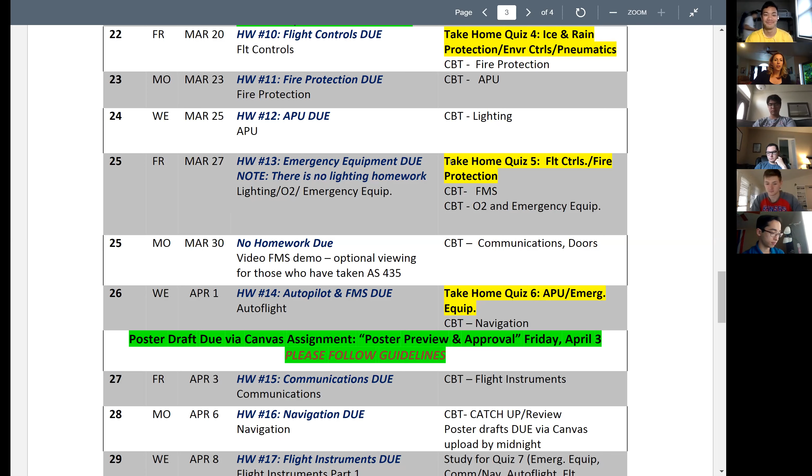I usually download your paper, help edit it, and send it back. If you're done with that, good on you, that's a plus. So we're still doing the take-home quizzes.

This class is actually perfect for online, it's great because you've got your CBTs already. Is anyone unable to access things like CBTs from where you're at? Pretty easy? Okay, cool. Email me if at any point you're unable to access something you need.

As far as the posters, that's up in the air. I think you should be able to create them if you have PowerPoint or Publisher. Wait, PowerPoint? Yeah. Oh, I don't have Publisher, so I have PowerPoint. Okay yeah, so if you just have PowerPoint, change the slide size and make it really big.

This meeting has been created technically — if we're not meeting again, what are we gonna do, and are we running out of time? No, now it includes unlimited minutes. Sweet, okay.

Here's the thing, at the bottom of the schedule. The contingency plan for poster presentations is going to involve — if me and Dr. Boettcher can sit in the same room together and watch your poster presentations, you're gonna make an appointment with us and we'll do a private Zoom. Maybe everybody should do that, actually that sounds kind of cool, you guys can judge each other.

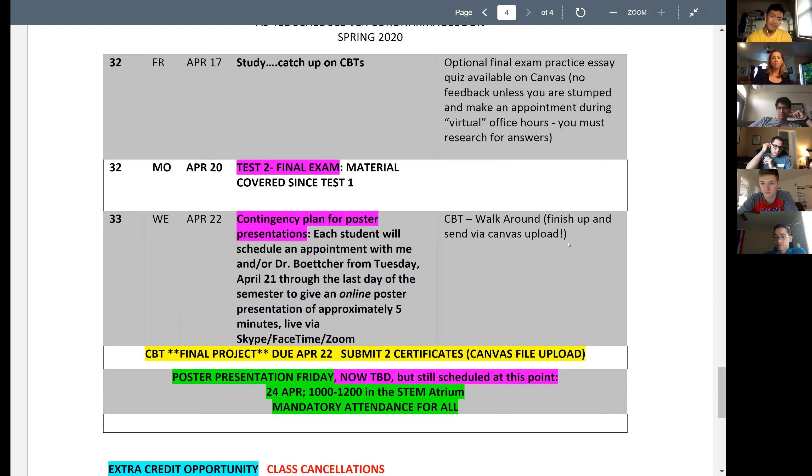Do we have to dress up? It's a valid question. You just gotta do the top, you don't even have to do pants. Yeah, just put on the fair jacket. Like, I gotta be honest, okay right now, do you see this? That's my PJs. Right, half only, there's no point in the bottom half. Yeah, right, I did put on a top that actually wasn't a PJ top.

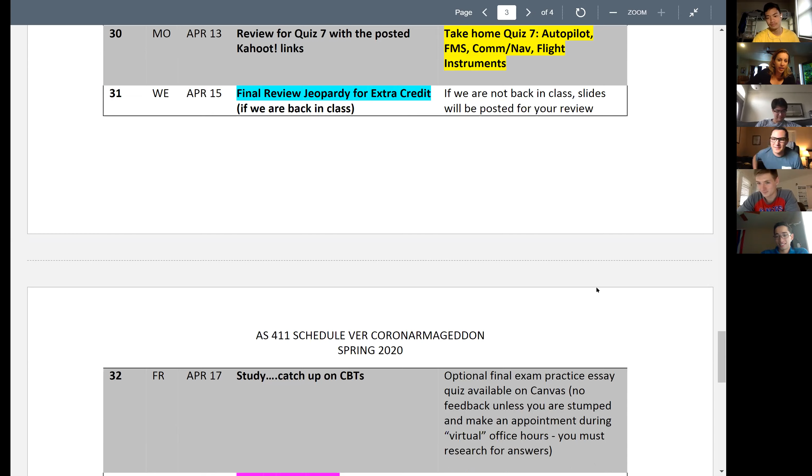All right, so number one, name of the game is finish your CBTs. A lot of your grade is going to be dictated on that. Do not miss your quizzes, they're still due on the dates on Canvas and on the schedule. If you happen to see one I forgot to change on Canvas, please let me know.

And for now, since we're recording this, how do I get rid of this? Yes, there we go, you can see what I was working on.

I'm also going to have to homeschool a 7 and 8-year-old. The very best of luck to you with that.

Any volunteers? I had a question regarding the CBTs. Sure. Is that just a completion grade, or is it like our cumulative grade on all the quizzes and exams, like a 90% on the certificate or whatever? Do we get a 90, or is it just that you turned in the certificate? You turn in the certificates, and I hit 500, enter. Got it, easy, all right.

So I will never actually be able to view your score, that's private login stuff. What I can view are the 2 PDFs that you're going to submit via Canvas. So literally whenever you get done with that, you can submit the PDFs. What are these PDFs now? Let me show you real quick.

It's on the wrong side. Okay, Canvas, inside assignments. I don't know what it looks like for students, but I'm going to give it a shot here.

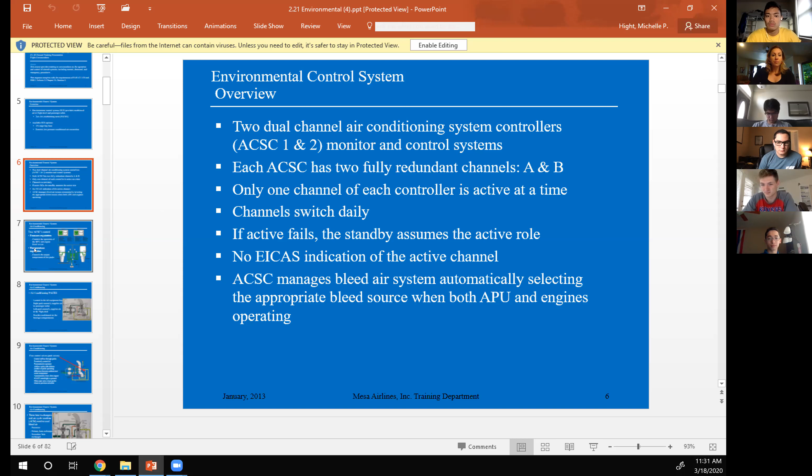Next one, pressure and temperature regulation. Who can tell me what the total pressure is in the system that the ACSCs control? No one? It's just 3,000 — that's hydraulic system, yeah, no, that's okay, that's fine. Isn't it to like 14,000 feet or something, or is that way off? Oh, I'm talking PSI, out of the engines. 45 PSI, so remember that's a number you got to remember.

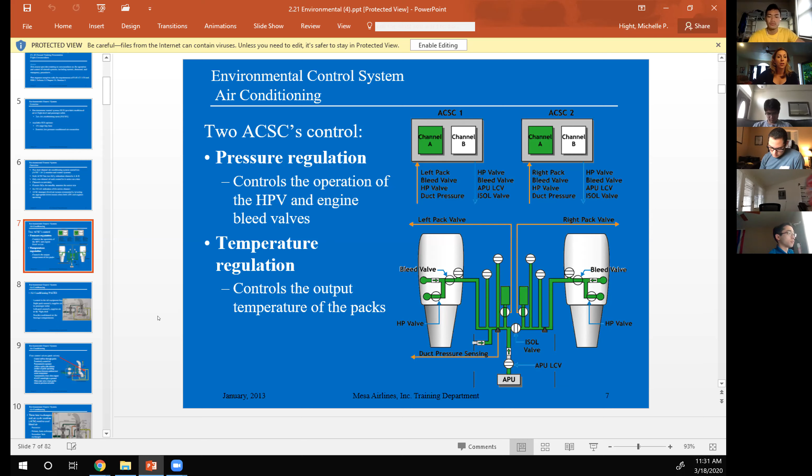So temperature regulation is basically the temperature of the packs. You reach up and set the temperature for the cabin. Here's a really nice schematic, let me zoom in on this. Gosh, I love these schematics that were like taken from a picture out of a manual. You're gonna do more in the way of fully understanding this when you're an actual airline pilot, but for now, take it with a grain of salt.

There's pre-coolers, it's just like your air conditioning system in your house — you ever seen that thing dripping? Takes the water out of the air, etc. So the left pack supplies air to the flight deck. That's semi-important because if you're troubleshooting — you guys ever seen that movie where the pilots, is it Sully? Troubleshooting the packs. It was a movie. Left pack typically supplies air to the flight deck. You typically start the left engine first as well.

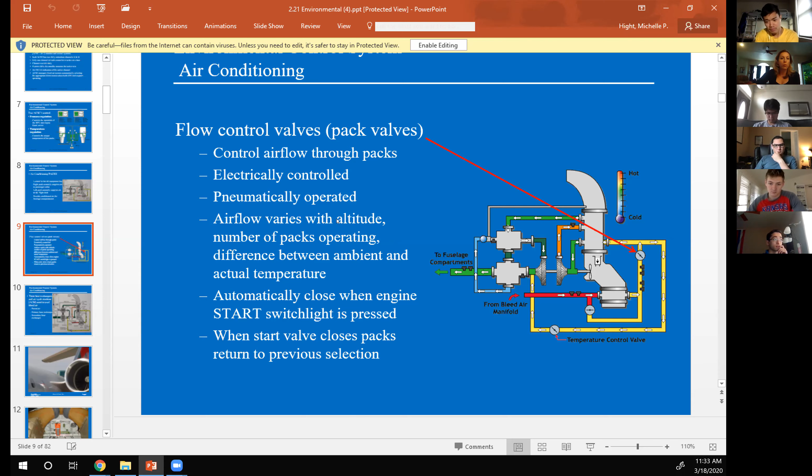Okay, moving on, flow control valves or pack valves. One thing you're going to take away from the slide, the most important thing, is that it closes when the engine start switch light is pressed. That's why when you're sitting in the back of that Southwest jet and it gets started, it gets stinky and hot for a second because the pack valves are closing during engine start. Electrically controlled, pneumatically operated — so if there's no air coming through them, they're not going to open or work. If you take electricity away from them, they're also going to shut.

Heat exchangers, questions on that? Basic stuff. We already went over anti-ice, right? I feel like we did, I think that was the last unit, wasn't it? Yeah, it's been a while, it feels like it's been forever. Like 2.5 weeks, it's been a long time. So I'm sure you guys have forgotten a lot.

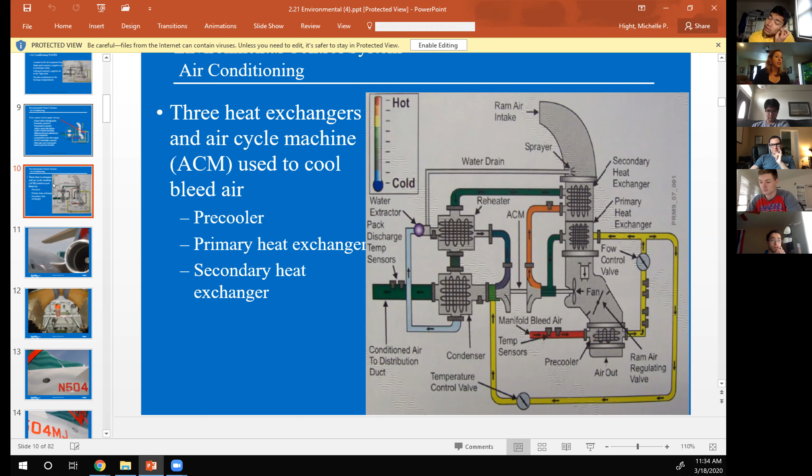I understand. So heat exchangers, really what you need to know is — I was talking to a friend about bleed air and how it works. It's hot when it comes out of the engines, you don't want that in the cargo compartments. A lot of cooling systems take care of this: heat exchangers, secondary heat exchangers. I don't expect you to really memorize any of that.

James, you look like you're sleeping. What is? Singling you out now, you're still calling people out. Are you kidding me? I was sending a text. Are you actually kidding me?

James, what is this thing you're looking at here? That's the RAM air cooler, the ram air duct. Yeah, it's just taking in ram air.

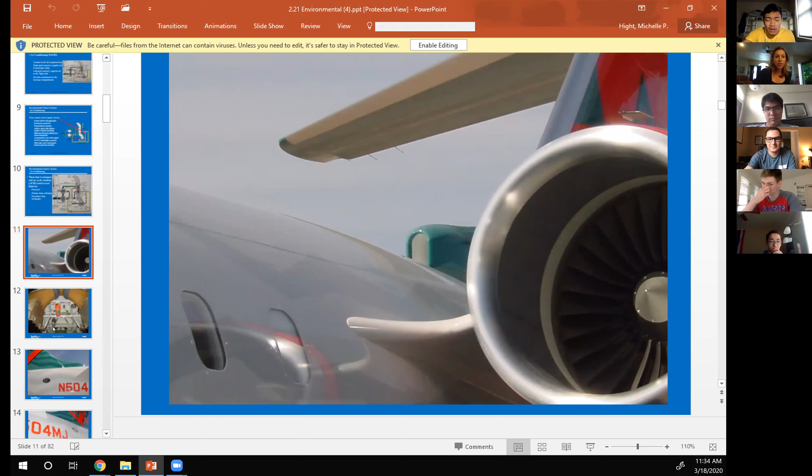Imagine if you're going Mach 0.83 and it's coming in that scoop. That's why we need pressure regulation, things like that.

So for your air conditioning packs, what's this red thing? ELT. Yep, okay, these are outflow valves. We'll talk about them more in later sections.

So where is that ELT in the plane? Like where are we looking in the plane right now? We right now are looking in the very back section, underneath the APU section, where this would be on the ceiling. No way you could reach it without a ladder, I've been told. In fact, pilots aren't going to go back there and access any of that stuff.

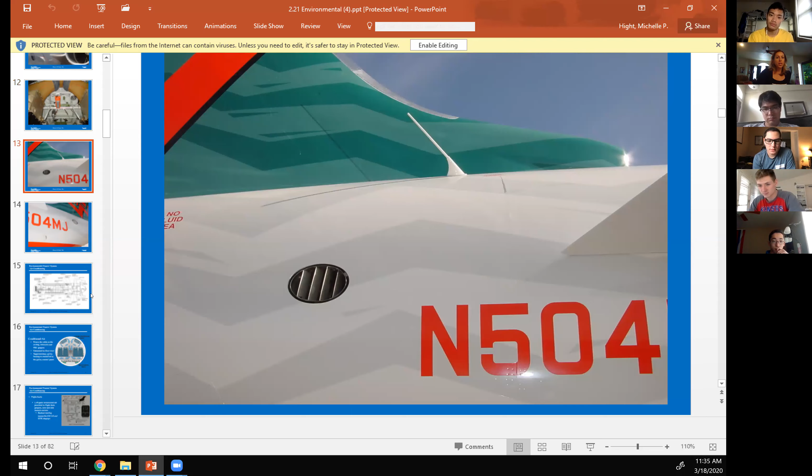And here's the outflow valves and some more outflow valves. You got safety valves and outflow valves, and that's later on in this, so I won't steal my own thunder here. When I was recording the videos, I went over this in great depth just to have the videos completely dump on me, but that's okay, we'll go through it again.

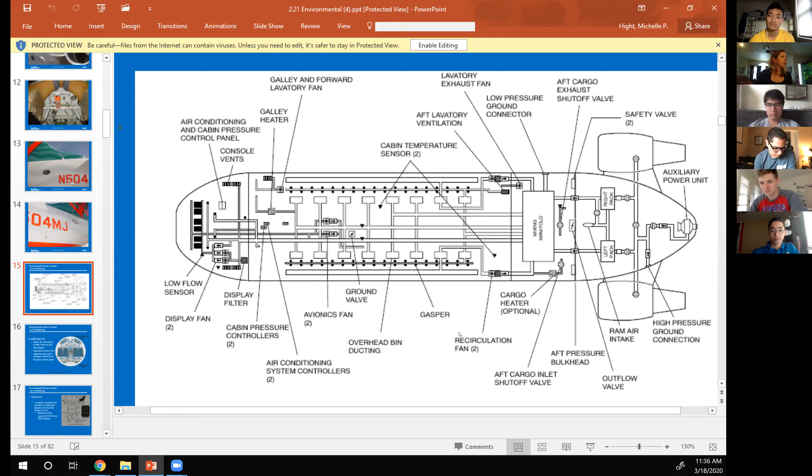Yeah, so when you're a co-pilot or FO, you're gonna do several check rides to get through training, and then more check rides later on. My favorite thing as instructor slash co-pilot was walking around the airplane before the check ride even starts, and you look terrible if you have no idea what these things are. If the instructor points to that and says what is that, and you have no clue, it doesn't look good for you. So do give these things a bit of study and understand all the holes in the airplane, all the antennas, things like that.

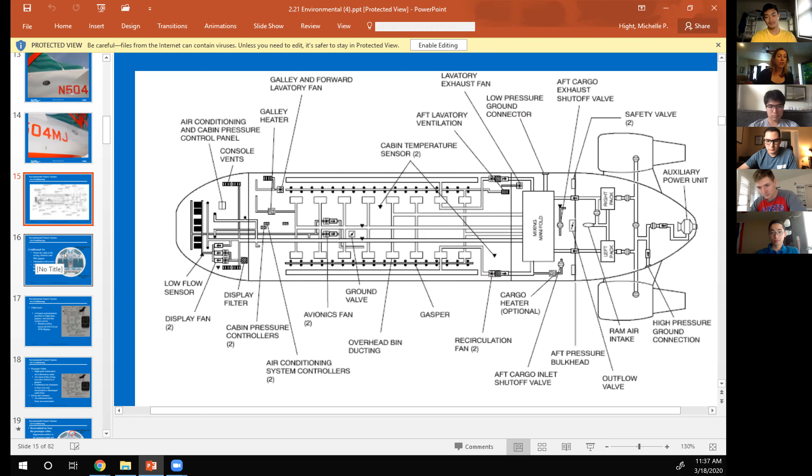Really makes you look smart, you want to start off on the right foot. So usually it starts with a face-to-face oral on the ground, and then you do a walk around. And if you look like a total buffoon in the walk around, it just makes your check ride a lot harder. How do I know this? I wonder, been there, done that. The whole, I don't know what the VHF antenna is - that bit me once when I was a brand new co-pilot.

Conditioned air, you can basically see how the recirc works. This is how we all get the coronavirus when we fly in a commercial jet now. Conditioned air full of germs enters the cabin at the ceiling, sidewalls, and the gaspers - you know those gaspers you turn on up above you - and then it's exhausted at floor level.

Hey, did anyone pre-study? I know you guys have been so busy pre-studying. Yeah, 100%, very funny, exactly what we did on spring break. No, totally, were just skiing. Not like I went horribly shopping for the past 2 days trying to find food. I know, me too, used to not find ground beef. I was trying to make some tacos yesterday. I feel that, like 3 stores, got a ton of ground beef, but apparently I'm not. So anyway, Jake, I was going to ask you a question.

What room in the airplane do you think is not recirculated throughout the cabin? What's the one place you wouldn't want the air recirculated? Elle's raising her hand. I was gonna say the bathroom. Yeah, the bathroom. 100% the bathroom. Like, why would it be recirculated there?

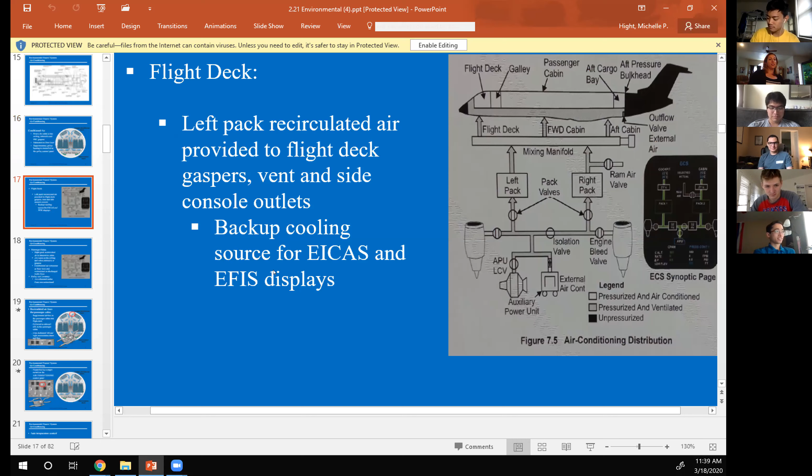Left pack recirculated air provided to the flight deck, gaspers, vent and side. That's also your backup cooling source for EICAS, and then there's a button. Hang on, I'm going to show you how it works. Where's the button? There it is.

See this recirc button? I wouldn't worry about toxins being released. If they're going to release a toxin, they're going to kill themselves and everybody else. That's why you guys got O2 masks up there. They want to be able to fly it into something, right?

So this air conditioning button here with the big red circle on it, the recirc on and off, allows you to either get sick because everyone else is by pushing it on, or push it up to off and it doesn't recirc through the cabin. When it gets to you, it's just off the left pack. That's what they told me at Mesa. So they literally call this the get sick button.

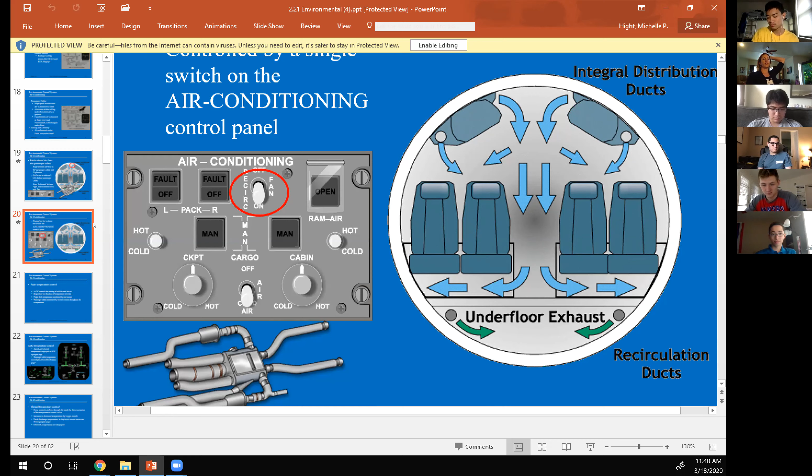It's not a button, it's a switch, but that's crazy. So do you think pilots are currently leaving that off right now? I would. I certainly would. I'm on a couple Facebook forums with pilots, and there's a lot of them getting sick right now.

It's no bueno. You guys are really lucky you're not out in the industry yet. SkyWest sent all of their new hires home yesterday. Same with United, they canceled the Aviate new hires. A bunch of the flight instructors that just float over to SkyWest, they're like, yeah, they sent us, they quarantined us and sent us home. Probably just because of the CDC telling people they can't meet in groups of 10. It's crazy. Well, because the airlines are also out of money.

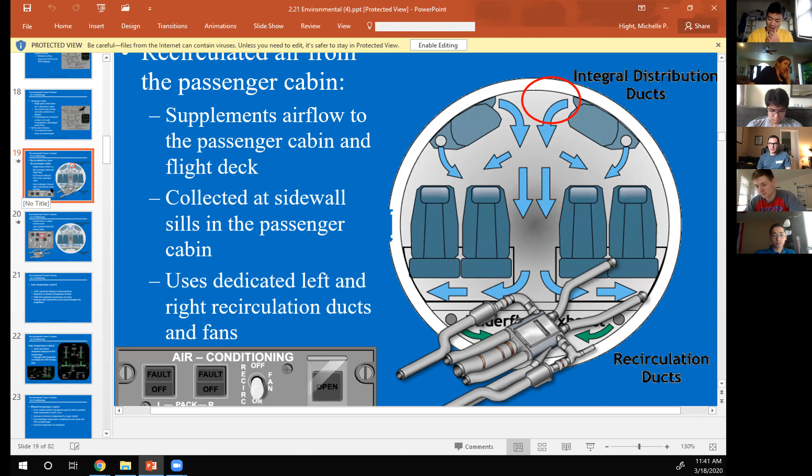You guys heard about San Francisco, right? I have a bunch of buddies in the Bay. It's on full lockdown, quarantined. Like you're arrested if you go anywhere, I guess. I don't know how people are going to survive. My friend in San Francisco's been telling me they can't go out after midnight. Oh, okay. Yeah, we can still sort of go places. Oh hi, Casey!

Okay, let's get through this so we can say that we went through this. We recirc air from the passenger cabin, which is what you kind of don't want right now. This is how it works. Here's a little picture of the duct. I think it's not showing you.

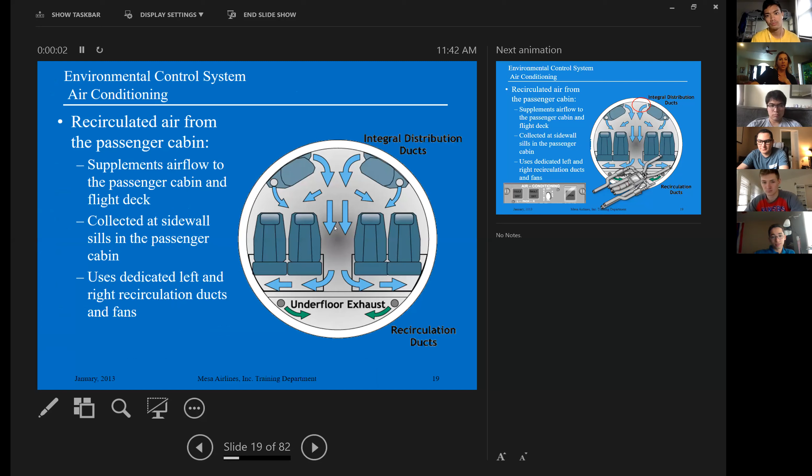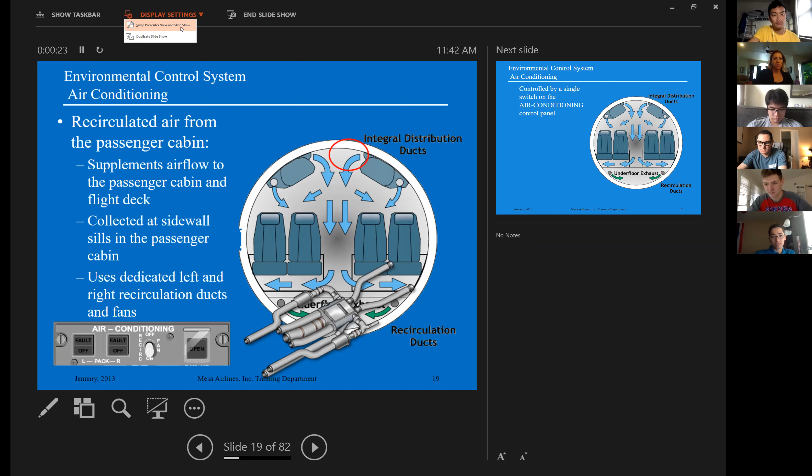Tell me what happens when I do this. Whoops, okay, what do you see now? We see the dual screen, like you're presenting something. Okay, oh but it's moving. It's moving, I'm clicking. Look at that, that's pretty cool. I kind of like this better, it's smaller too, so thank God. Recirc air, and I think, ooh, I have an idea, display settings. Swap. Hey, a real presentation.

How cool is that? My dogs are snoring behind me. Really? Faint, can you see him? He's loudly snoring. Apparently I'm not holding their interest very well.

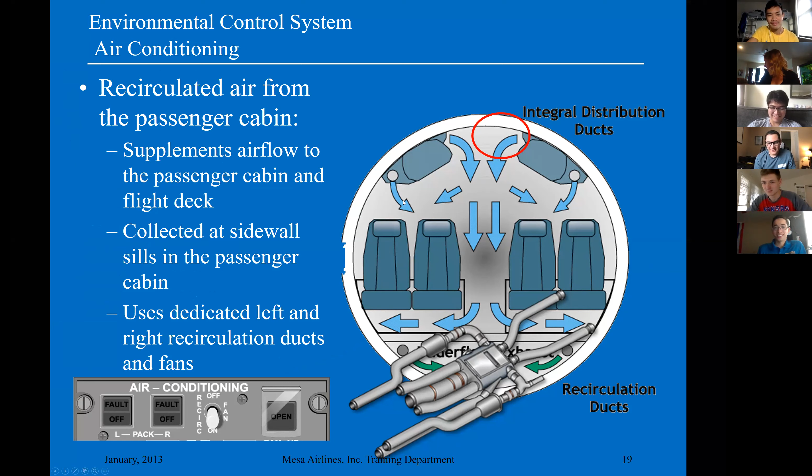Left, right, recirc ducts. All right, where were we?

All this recirc is controlled by that single switch. It's a very important switch right there. The get sick switch.

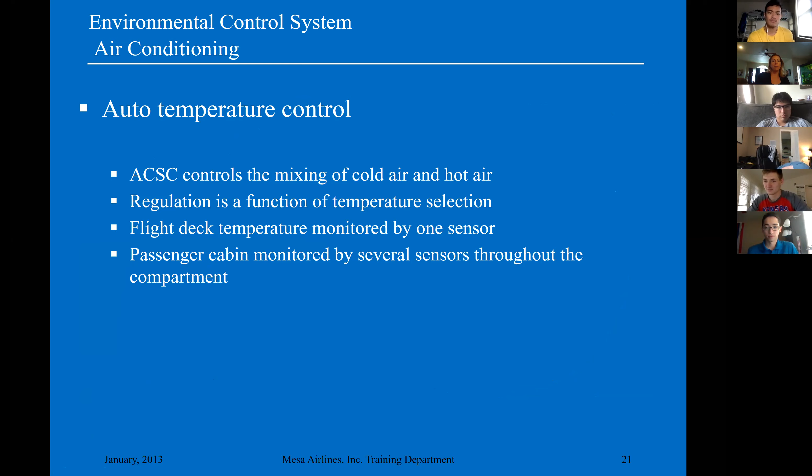Auto temperature control is basically, you don't have to think about it. It's monitored by one sensor, and the passenger cabin has several sensors.

Here's the important slide. This is where I pulled 4 or 5 multiple choice questions into the bank from. So actual and selected temperatures on the ECS only, selected actual. So here, 22 and 20. Obviously, you have 22 selected and it's not quite warmed up yet.

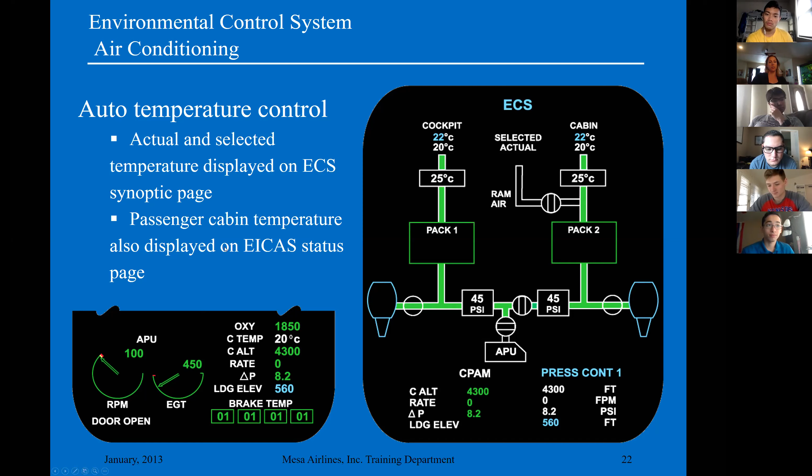Passenger cabin temperature is on the EICAS status page. So it's both places, but see the actual temp, 20 degrees over here. So status displays the actual temp, and then ECS displays your selected and actual. Questions on that? Okay.

It's just fancy stuff that you don't really need. Manual temperature control - you can actually use a toggle switch to change the temperature control. This is a really great thing to argue about with the other pilot. I spent many years arguing with flight engineers. They're usually big dudes. They're always hot, they want it to be 55 degrees in the flight deck, and I was freezing.

So increase or decrease temperature, I'll show you this right here. Manual, look at that, cockpit and cabin. You go manual - what happens if this fault light comes on? Your AC is blown out. Well, technically the test answer is that the pack shuts down, so the pack valves close at that point.

Welcome to the party, whoever just showed up. This is being recorded, so you can go through and listen to what we just talked about. It'll be rather entertaining, I think.

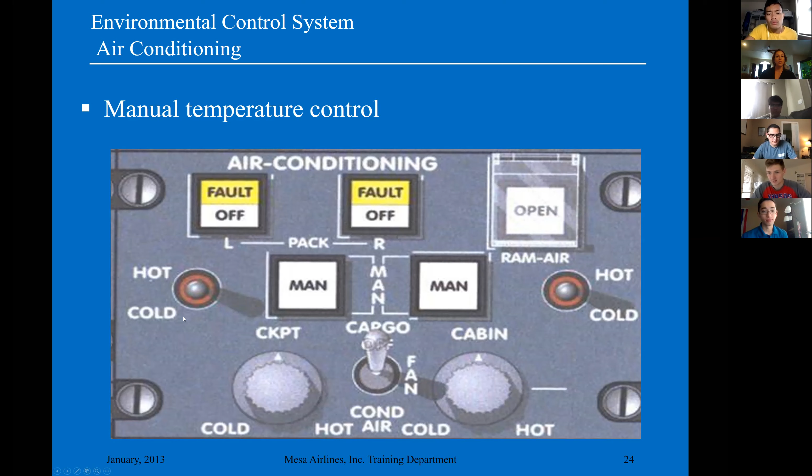So notice this right here, this hot-cold toggle switch on left and right. This would be your cockpit hot-cold, this would be your cabin hot-cold.

Jonah, who just walked behind you? The ghost. No. We're still living in a dorm, okay? Sorry. Does anyone need a soothing look at my fish? Yes, okay, I want to show you something. Do you see these weird fish that I have? See how they all hang there, sort of upside down? No, they're looking at me now. You gotta go closer. I can't, I'm attached to the power cord and it's not working. Those are tiger barbs. I love that, they're all schooled over on this side always when I'm sitting here, looking at me. It's mildly creepy, they want to be with you. I know, sorry guys. It's weird, stare at me. Meanwhile, my dog is snoring.

Okay, moving on. Airflow monitored by sensors. I don't care that you know these numbers. So can you still see my slides? Oh, thank God, yes. You don't memorize that, please.

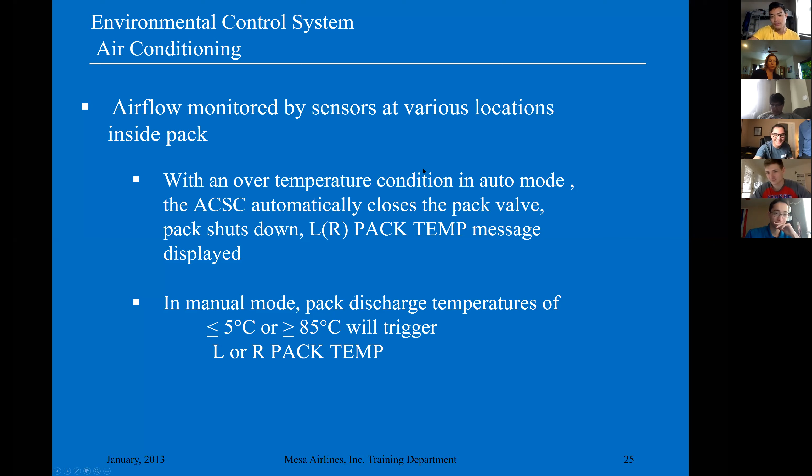But that's like a lot, that's like 6,000, that's a lot. It is. Technically, you could show up to work and have one of the packs MEL'd out. If that happens and you got this MEL, you got to make sure your dispatchers haven't planned you for a higher flight level and filed you for that. I can't imagine you'd actually accept an airplane with one pack, because if the other one fails, you're going to depressurize. But in theory, you could.

So fault switch is an over temperature or over pressure condition, and it's going to automatically close the valves. You must manually reset them per the QRH, and if for some reason they don't reset, you're going to be descending to 10,000 feet.

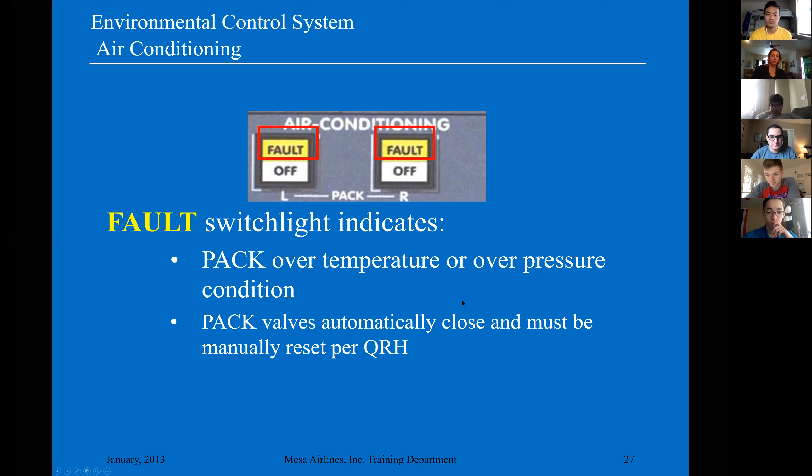Why would you ever use a ram air shutoff valve? I can't think of a reason why you would. But maybe you're ingesting hail or something. Yeah, I mean, if you're in like a storm, like snow or something.

Well, is there a reason, or is there like totally not a reason? Volcanic ash. I don't know, oh yeah, would volcanic ash be one? Maybe, maybe. You're going to fly through a volcanic cloud, you got bigger fish to fry. You've got engines that are going to ingest, and you're going to be shutting things down. So my question is, why do you have it if you don't ever use it?

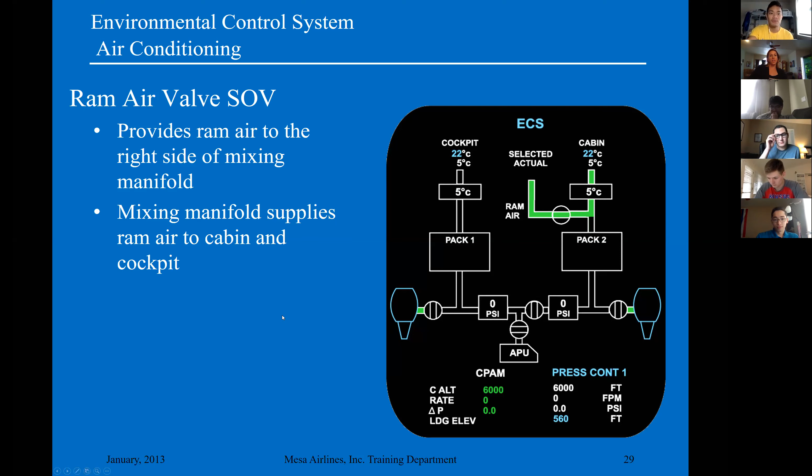I don't know. It's like this next slide, this ram air valve here - do you see the plexiglass black, do not open. It's only for unpressurized flight. And in the airlines, if you're flying unpressurized, you're having a really bad day.

That's weird. I used to unpressurize the airplane at about 10,000 feet in combat only. Why? Because you're going to get shot at and get bullet holes in the side of your plane, and if you're pressurized, that hole can open up. In the airlines, I'm not sure why you would do that. It also makes you sick, unpressurizing like that, super high - altitude sickness. Especially because we used to do like 4 or 5 different hops in a day, it would make me sick eventually because it's cold up there.

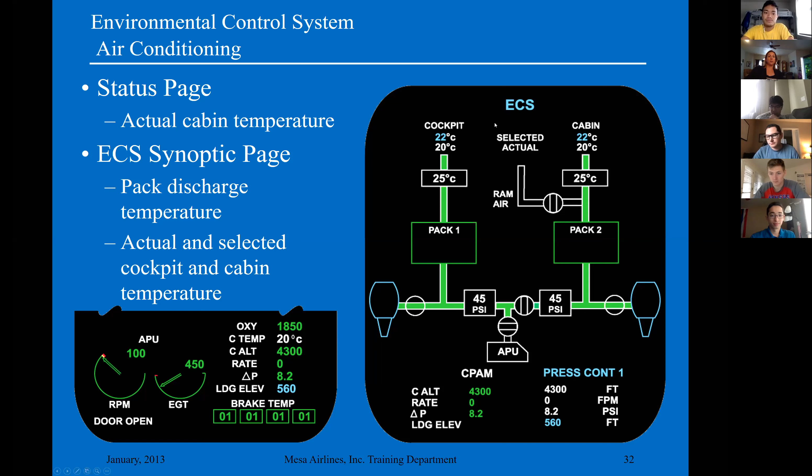All right, next slide. Status page - why did we just go over this? I feel like we just went over this. Actual cabin temperature on the status. ECS synoptic page does selected and actual.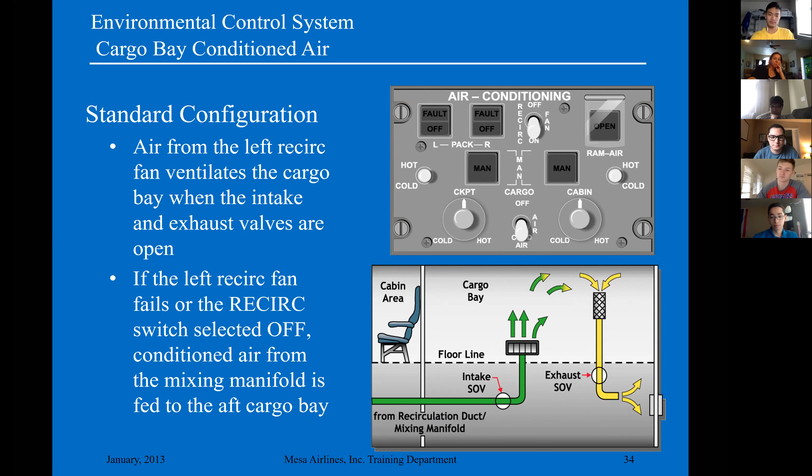Why did they decide to put the intake on the floor? Because it kind of seems like, germ-wise, a dangerous place if that's where everyone's luggage is sitting on the floor. I don't know, I have no idea. It's just weird - I'll have to answer that with an 'I don't know,' it's just how they all are.

The big thing - remember the forward and aft cargo bay, where you put the miniature pony? We've done this before: don't put your miniature pony or your doofy poodle in the forward. The forward cargo bay is not ventilated or air conditioned.

All right, and this - I would just give this slide a quick study before the test - off obviously closes intake and exhaust. What else? Questions on this? This toggle switch is just outlined what it does.

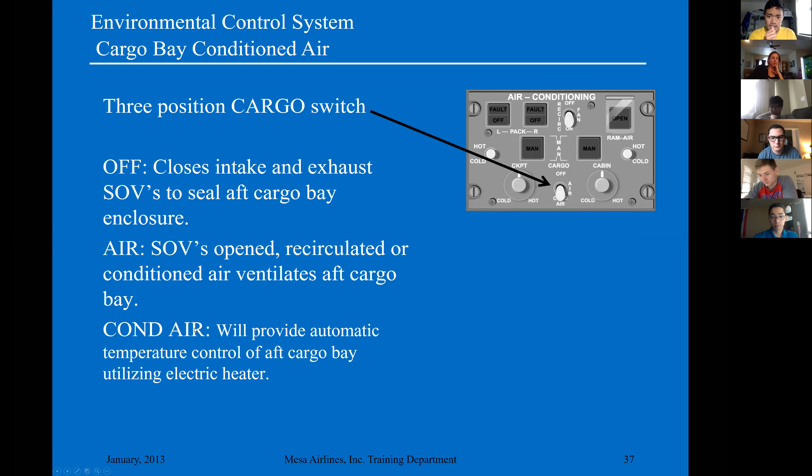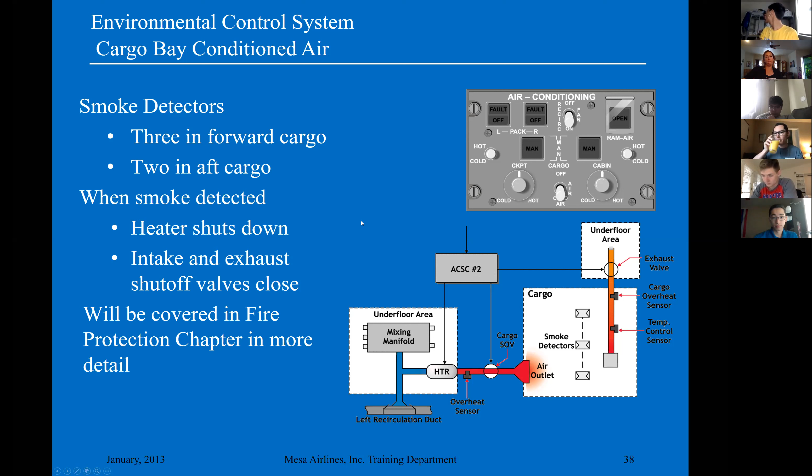Smoke detectors - yeah, there's multiple choice questions on this. Hate to tell you, you got to know 3 in forward cargo, 2 in aft cargo. Just memorize that, or at least be able to look it up in time. This is also information you're going to be tested on in the fire protection, so double whammy - it's on this quiz and the fire protection quiz.

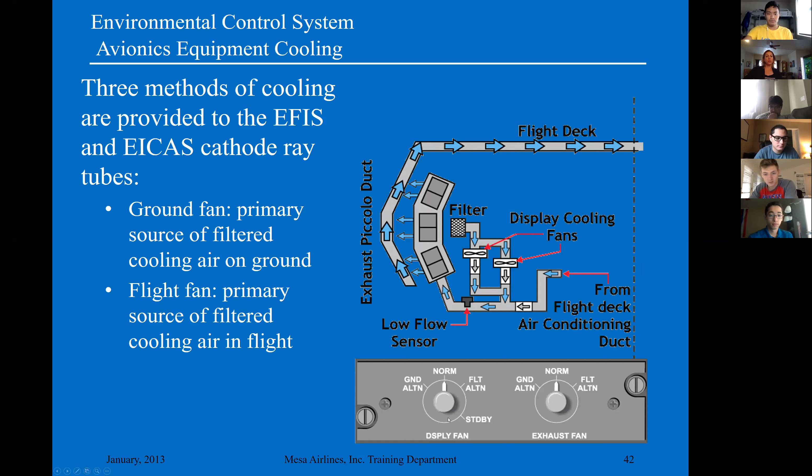I do not care that you know the routing of the airflows in these cathode ray tubes, just that you know they can't run without cooling air. Remember talking about how these things are - this is another schematic of how it works, but we don't really care that much. We know that cathode ray tubes need to be cooled, so there's a ground fan and a flight fan. You can actually change how it works, but not going to ask you too much on that.

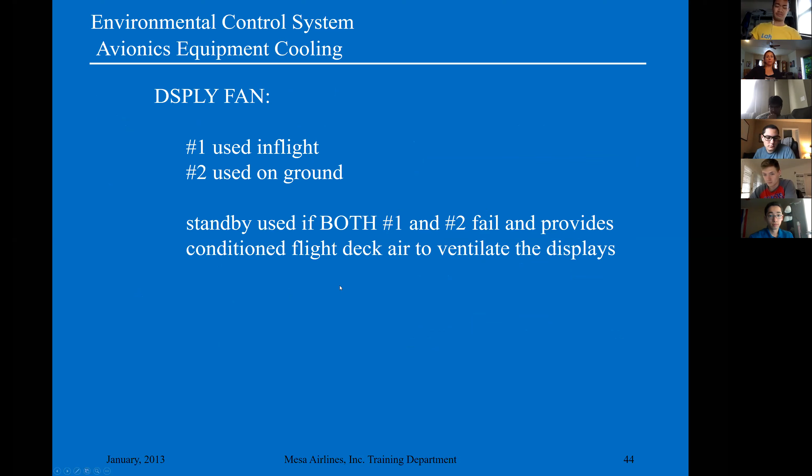Display fan used in flight and on ground, so basically it's ventilating the displays. There's an avionics fan - you got to keep avionics very cool, and the more advanced the avionics, the cooler it has to be. Which is why the E model C-130, which had like zero avionics, we could operate that thing at like 300 degrees - it was insane how hot it was in there. And when I transferred to the Talon 2, we had a lot of avionics and it had to be like 65 degrees in there, so it's kind of a welcome relief.

Someone's calling me. Okay.

As far as exhaust fans, again, not something I'm going to ask you about too much. We're getting to it, we're getting to it. Hold on - ground valve, we already talked about that. This is way TMI on the ground valve. Emergency depress on the ground, the valve opens at full speed, which is 2 seconds.

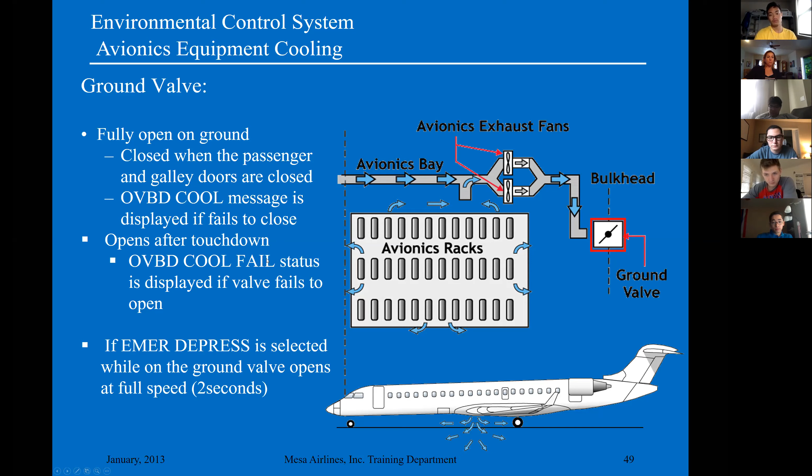Nice picture - we're just looking at the systems that were in the schematics. Kind of cool though, it shows you where it is in the airplane.

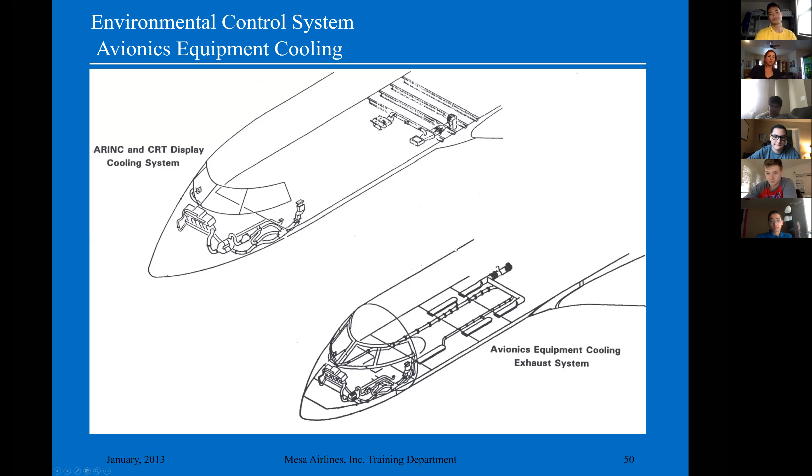Okay, here we go - cabin pressure controllers. You got 1 outflow valve with triple redundancy electric motors, very important valve. And then you got 2 safety valves that work if the 1 outflow valve with triple redundancy somehow fails. You got an emergency depress switch, which you can hit, but you got to lift a plexiglass switch cover.

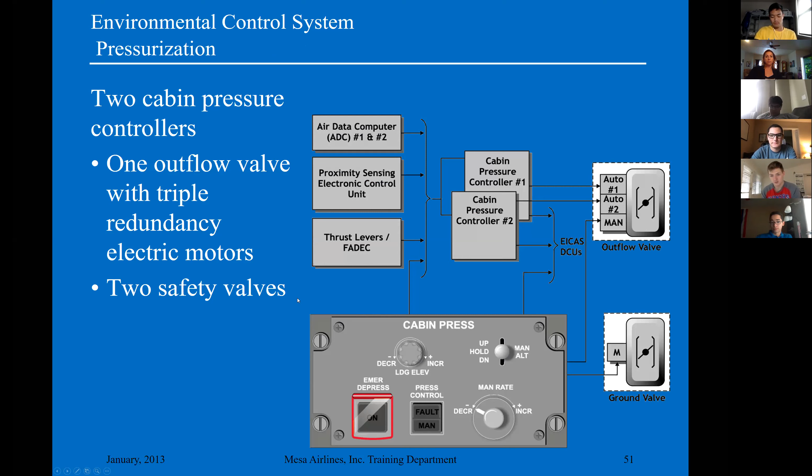Pressure controllers, basically all control outputs sent to the outflow valve. Weight on wheels plus 3 minutes is when they automatically switch to ground mode.

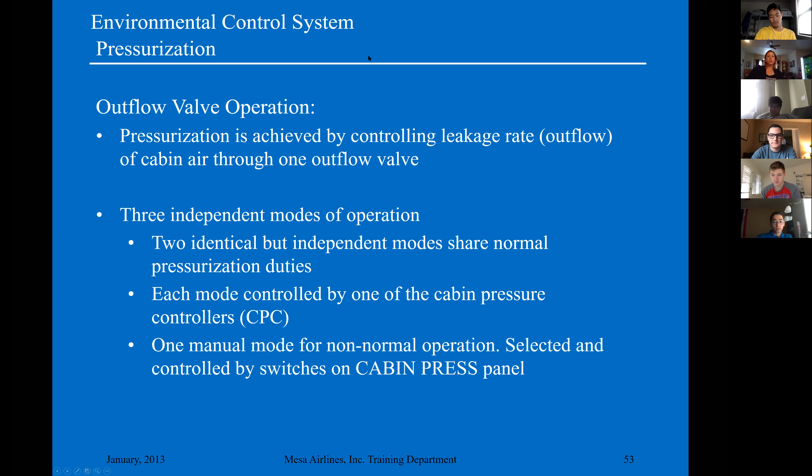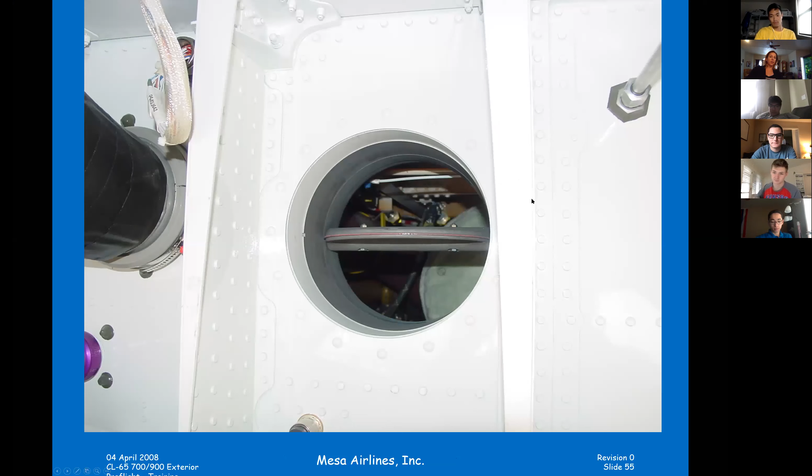Questions on outflow valves? It's just a controlled leak through the outflow valve. Safety valves are really only for when this fails, so you've got this and 2 safety valves. There they are, they look like pucks. And this is fully open, obviously.

It's calibrated based on the pressure that you set. You can do a manual increase or decrease for cabin pressure, but usually you're going to use the isobaric controls, and you're just going to have it set at 8,000 feet for cabin pressure.

Stop me if I'm going too fast. Here's basically the cabin altitude here at 6,000 feet, and the rate is decreasing at 500 feet per minute. Change in pressure 8.0 — I'm not sure what that means, but all right, that's where it is though.

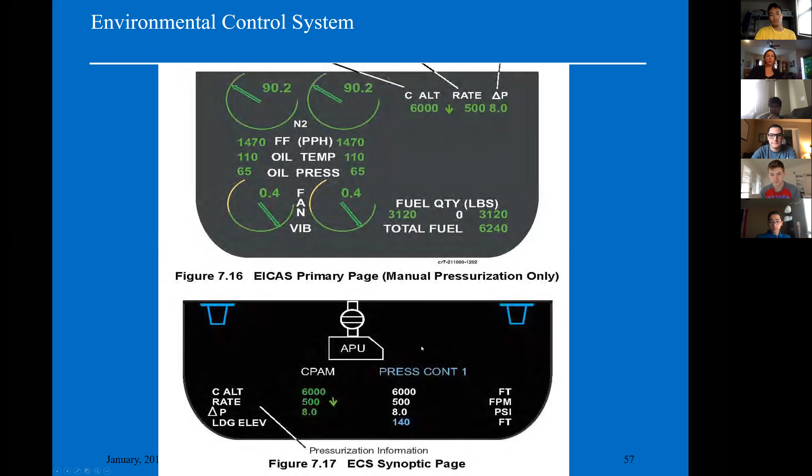Primary page, manual pressurization only. So when you start using that switch to manually pressurize, it'll pop up on the primary page.

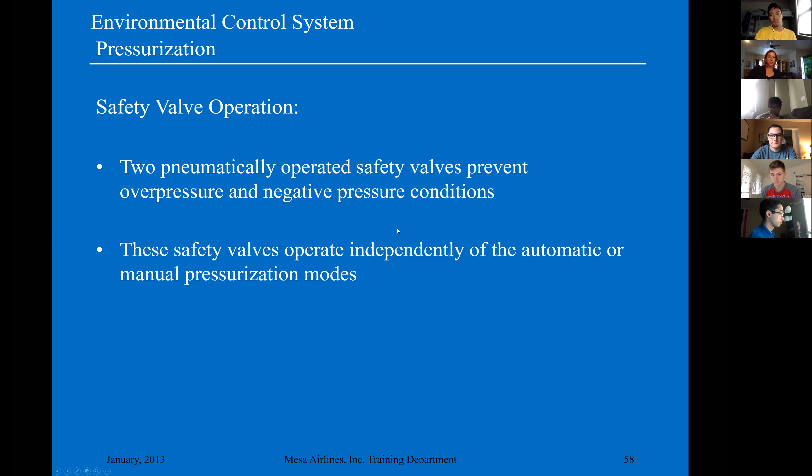Safety valve prevents overpressure and negative pressure conditions. You ever squeezed a soda can? That's negative pressure. Positive pressure is better for an airplane than negative pressure. And differential pressure will be your warning if you have an issue.

What do I want you to know about the CPCP or CPAM? This is so much more fun when we can play Kahoot afterwards.

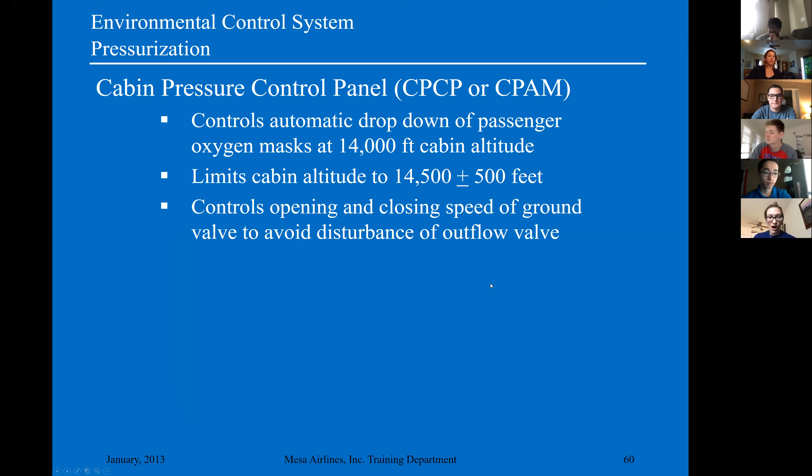This limits cabin altitude to 14.5 plus or minus 500 feet. That's the number you're going to have to know. The oxygen masks drop at 14,000 feet cabin altitude — not altitude, but cabin altitude. Said that really fast, test question: 14,000 feet is when the O2 masks drop.

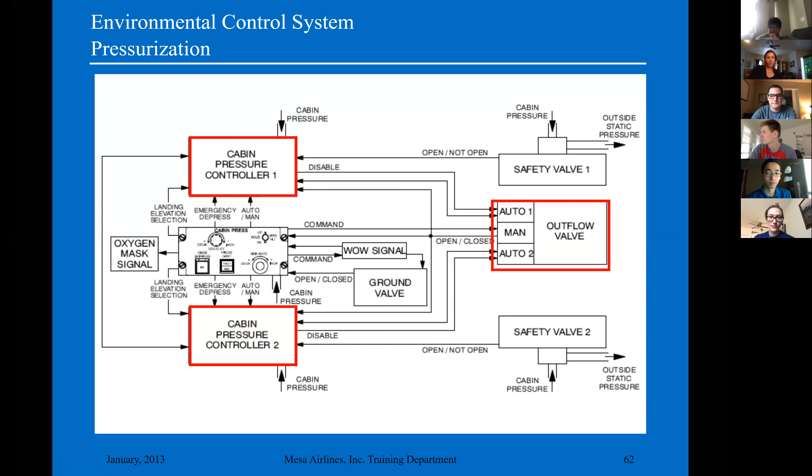More schematics, my favorite. We're not going to go over that schematic too much. I think there's exactly one question on this, and I believe it has to do with the normal pressure differential, 8.5 psid, but it's helpful to know that 0.1 is the limit for taxi, takeoff, and landing.

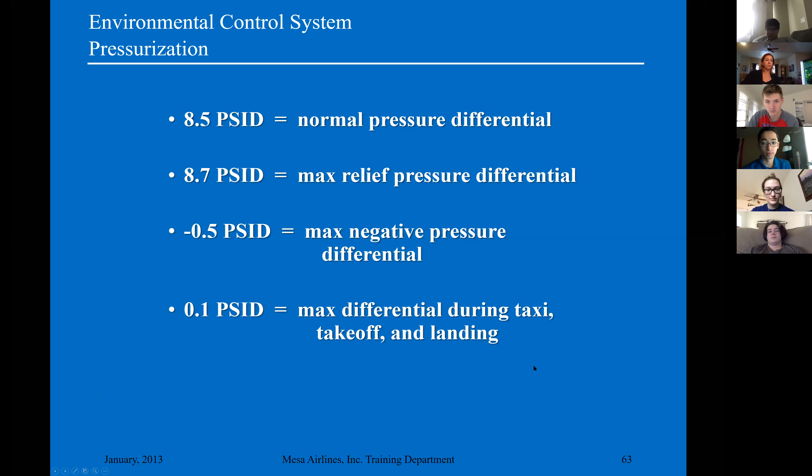If you have pressure on the airplane, you've got to egress the airplane, the door will fly open and people will fall.

The automatic pressurization mode is very important when you become an FO to understand how all this works. As far as what you need to know, the pre-pressurization mode is what I put on the quiz. So it's on the ground when thrust levers are advanced for takeoff. You get ready to take off, the cabin pressurizes itself to 150 feet below actual field elevation. And the instructor could not, for the life of him, answer me the question of why it does that.

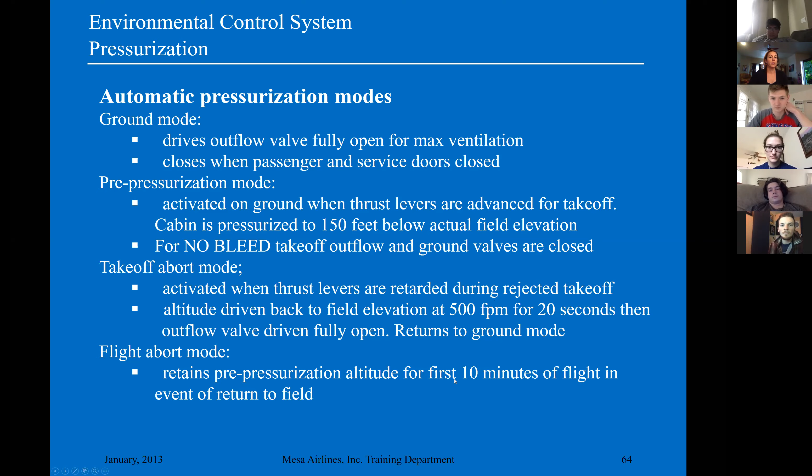It's strange. If you do abort the takeoff, it goes back — so when the thrust levers are retarded, it's driven back to field elevation at 500 feet per minute for 20 seconds. Why does it pre-pressurize? I don't know.

The climb mode is a very gentle 300 to 500 feet per minute, and cruise is basically, for every cruise altitude, there's a cabin altitude — not above 8,000 feet though.

Descent mode, approximately 300 feet per minute, so nice and gentle for your passengers.

Emergency depress is a manual DC motor that drives the outflow valve open — slowly when you're at altitude, and in 2 seconds when you're on the ground.

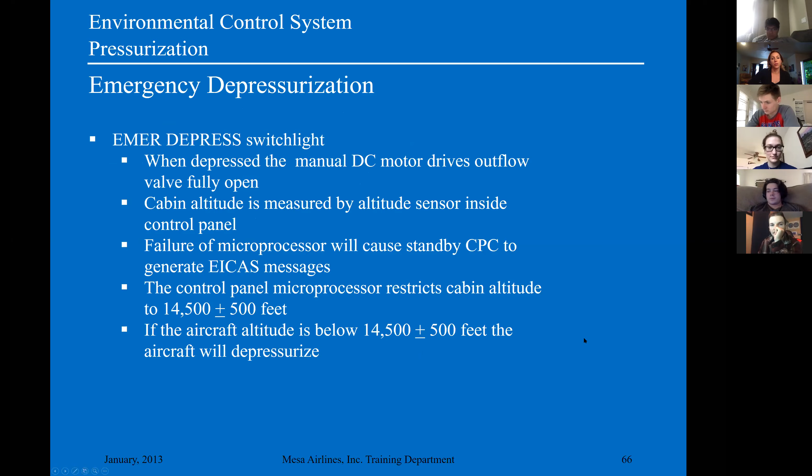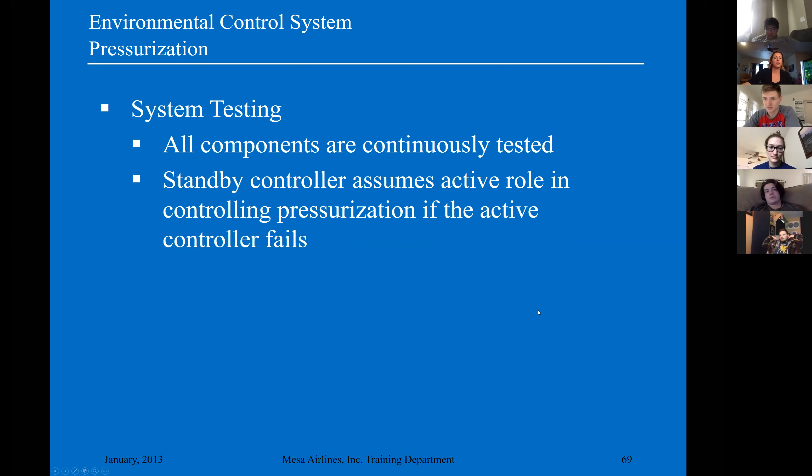Here's the voice message: if you get over 8,500 feet cabin altitude, you get a cabin pressure warning. System testing, it tests itself basically continuously.

There's only 2 warnings: the cabin altitude over 10,000 feet, and then differential pressure when excessive cabin differential pressure is detected of over 8.6 plus or minus 0.1 psid.

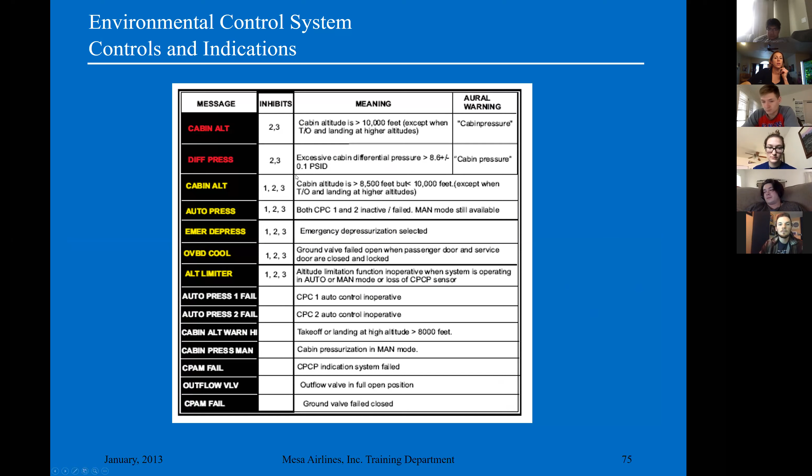Questions on what I'm going to ask you? Okay, what do you do in a rapid decompression?

Descent. Panic? Don your oxygen? I said descent, but I mean, it also says right there, so I don't know.

No, I mean, yes, you'll have your hands full of airplane. You're going to be descending, you're going to be wanting to talk to ATC at the same time, especially if you're in busy airspace. But what was hammered into me during training was never forget your own self. If you're at 30,000 feet and you don't don your oxygen mask, you're going to be unconscious before you get to 10,000 feet. I can tell you.

Has anyone gone through the altitude chamber training yet? No. I really wanted to at the Women in Aviation conference, and they were completely booked by all the exhibitors. That's very unfortunate.

Kind of fun, it'll show you what getting drunk without alcohol feels like. I love that — it'll give you a real perspective on how fast you go completely loopy if you're at altitude and something like this happens.

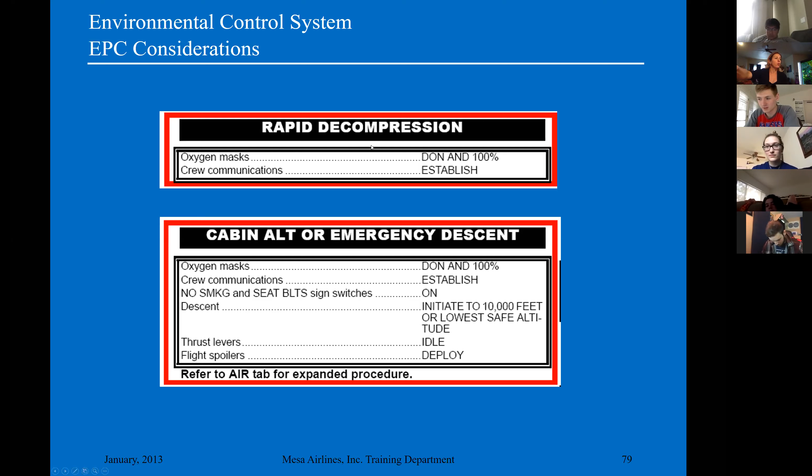Number one thing is don the oxygen mask, turn on the comm switch so you can hear each other. That's what the QRH says, though I didn't even read it there. Oxygen mask don, crew communications switch it on, go from boom to mask. Then you start talking to ATC.

But hey, at the end of the day, if you have TCAS, let everyone else scatter, who cares. You're the one that basically has to keep your passengers alive at all costs without hitting someone or terrain.

Fair, yeah, don't hit terrain. Hitting terrain kind of doesn't keep them alive. Yeah, it's a really good technique to stay above all terrain unless your wheels are down and you're landing on a runway. Just a good technique.

Ditching, a forced landing, it says pack switches off and depress on.

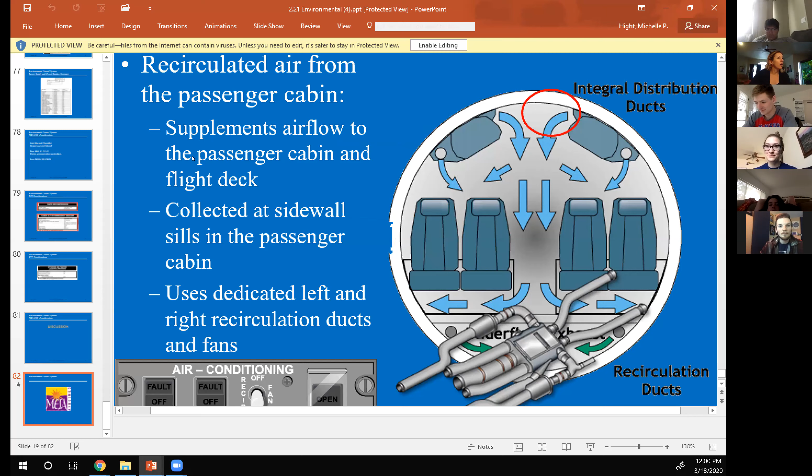Good luck, I want to try something. What do you see when I say raise hand? Oh yeah, I see. I'd have to be looking at that screen at the right time.

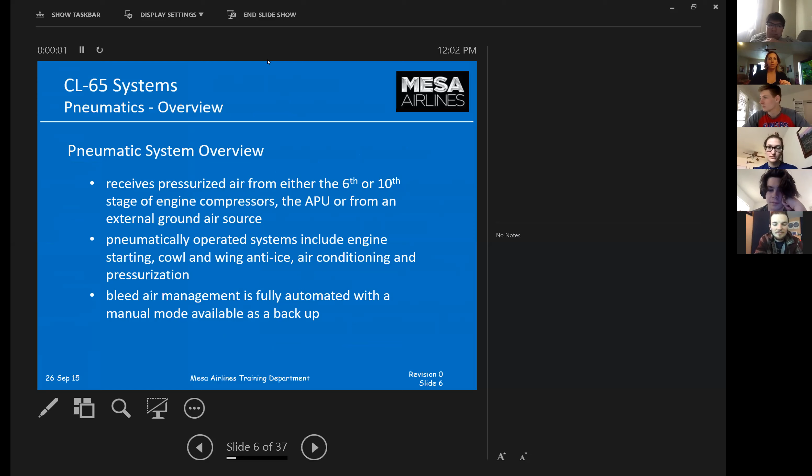Okay, so I've already skipped to slide 6 because that's where we start. 6th and 10th stage. What is the 6th stage bleed valve called? Anyone? High pressure? Nope, that's the 10th stage. 6th is low pressure, it's called the bleeder valve. Hey look at that, the 10th stage has an unfortunate acronym, it's got the HPV acronym. Right, I can remember that when they refer to HPV they're referring to your 10th stage. Important for you to understand how these things work.

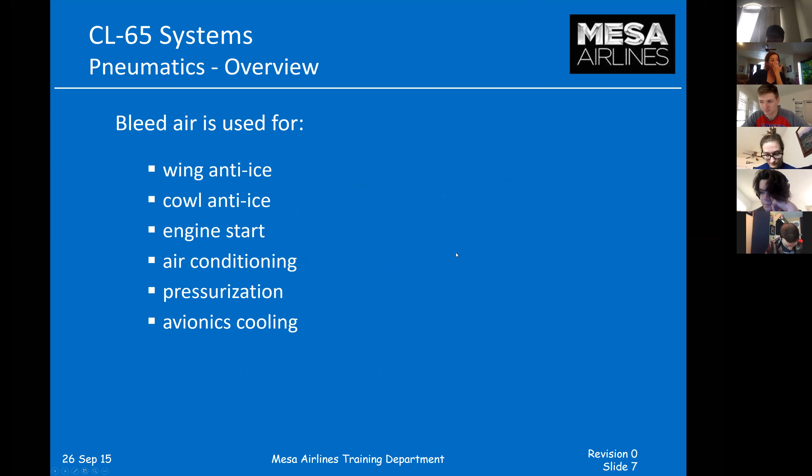They're automated, you can't select the 6th or 10th stage. We kind of went through this in power plant so I won't hit it too hard, but here's what bleed air is used for. Distribution is all automatic, you don't have to think about it too much.

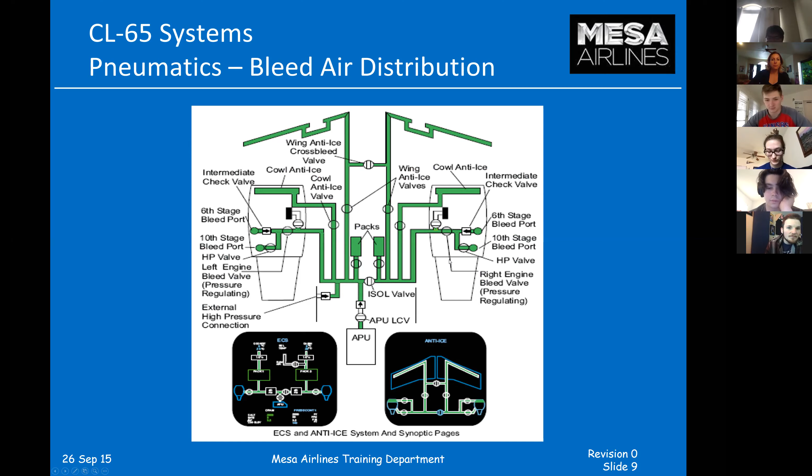You get the ECS page that shows you what's going on, 45 PSI, I mentioned that number already. Whoops, let me go back. Cabin pressure, cabin temperature is whatever you select. You can make it cold, your mood, you're in the power seat, you can just make it whatever you want.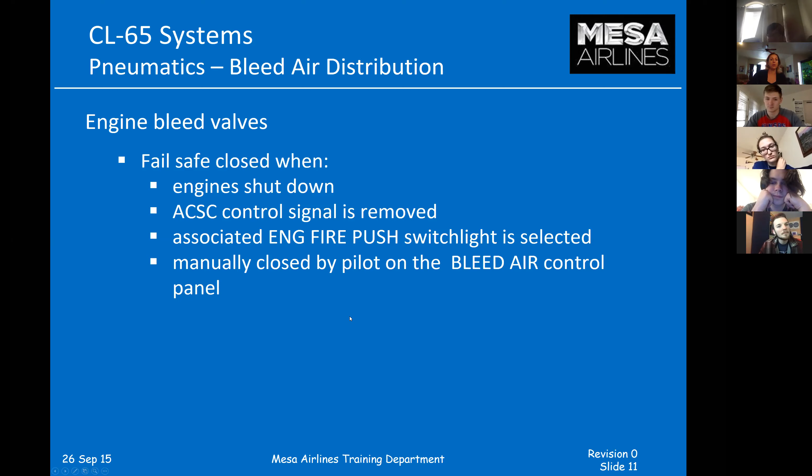Engine bleed air valves fail safe. This is what you need to know for your test. If you shut the engines down, clearly the engine bleed air valves shut, they don't remain open. If you push the engine fire push switch light, they also close. And then obviously if the ACSC control signals are removed, so electrically, and they shut down pneumatically too, if you stop running bleed air through them. Hey look at that, when the engine shuts down, the airflow stops. That's what really stops your valves.

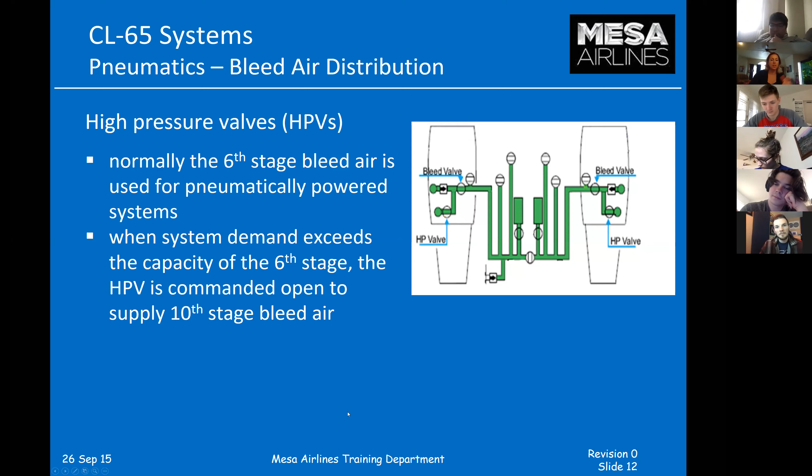So I already said all this. Capacity exceeds the 6th stage, it opens the 10th. There's check valves so it doesn't run backwards. Load control valve is controlled by the brains of the APU.

So switching gears to the APU, obviously the APU pressurizes it to the same 45 PSI. I'm going to ask you a question later on the test, it might even be an essay question. Say you're taking off, you're in TOGA, you've just lifted off, cleaned up, and you pull the power back to your climb setting, and say the APU is still running. Is it going to run the bleed air manifold or is it going to switch to the engines? Hunter, what do you think?

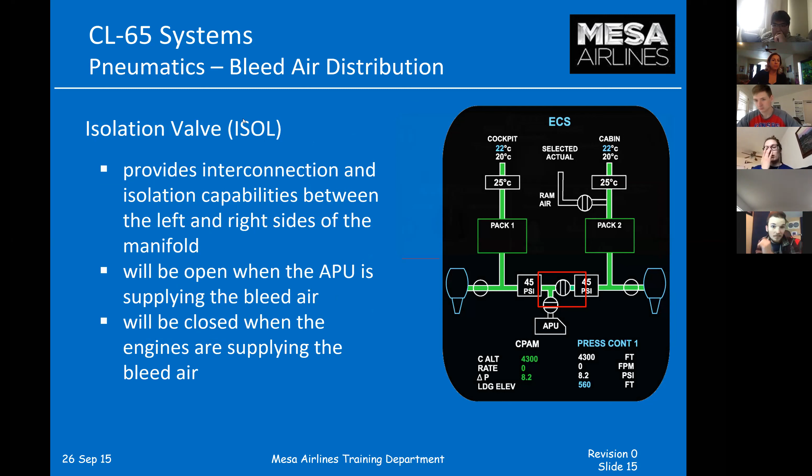Let me go back a slide or two. Isolation valve is one of those things. You can open it if the APU is supplying the bleed air, and it's closed when the engines are. It's basically the isolation valve down here. This one prevents APU and engines from pressurizing the manifold at the same time. You don't want that, it might bust something.

Manual mode is important too. You can manually control the isolation valve if you have to. The CBTs go into that ad nauseum.

And then this is just a general slide that shows you how bleed air is managed. What are the elements of the bleed air management?

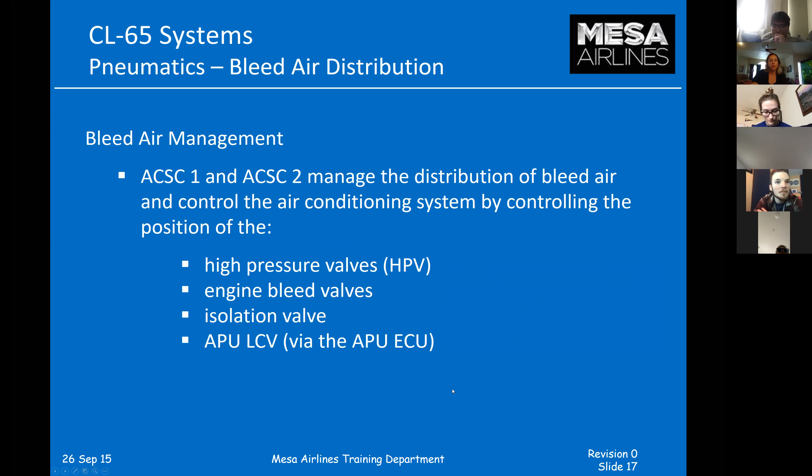I think I put this into a Jeopardy game somehow, that we probably won't even get to play. I'm so sad, sorry.

I don't know how we'd play Jeopardy online, that would be a whole level of skill. We could still play Kahoot though. I don't know if I have the energy to play Kahoot today, but we could do it, we should play it. Well, I wasn't sure what was going to go on today, so I'm not sure everybody's here at the moment. There's only like 15 of us. The afternoon class would have no clue I'm doing this right now. I'm in the afternoon class, I just happened to get an email. Not everyone's at their computer.

We're switching to auto mode. Okay, let's move on. Here's the slide that says flaps 20 degrees or less, or retarded from the toga, and thrust levers retarded from toga.

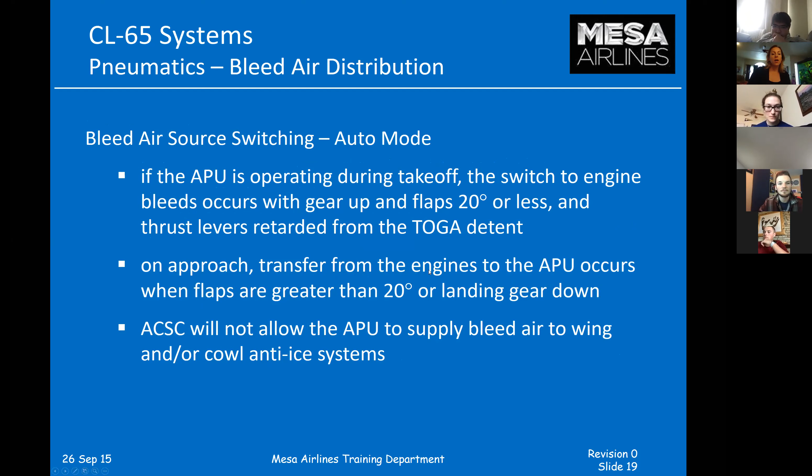That third bullet, by the way, is the dead horse again: ACSC will not allow the APU to supply bleed air to the wing. Does anyone know what happens? Say you want bleed air to your wing for anti-ice, and your APU is running the system, and you switch on the wing or the cowl anti-ice, what happens?

Does it explode? Maybe it just overheats, or it's just too many things at once.

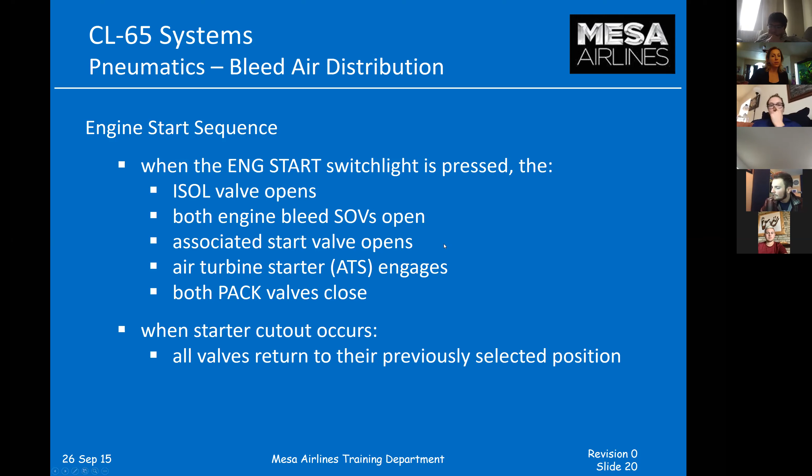No, the EICAS will generate a caution that says bleed misconfig, that's all. And it won't let you open the wing anti-ice valves or the cowl, so it won't be open, it won't ever be open, like both of them at the same time. It won't let you. It just won't let the APU pressurize the wing and cowl anti-ice valve, so it'll just not work, and you'll get a bleed misconfig. That's a really popular question on the test and quiz.

Interlock prevention: basically the ACSCs have to close the bleed air valves to open the APU load control. They can't do it at the same time. It's not going to allow you to do something dangerous, in theory, let's hope, if everything's working.

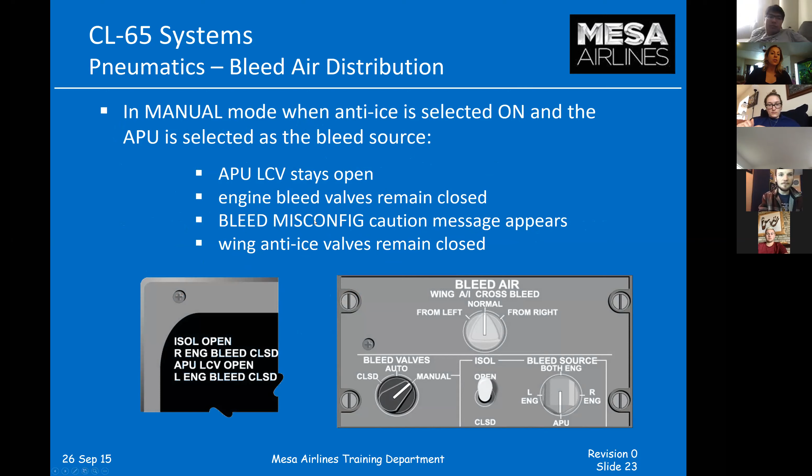Bleed misconfig, there it is, the caution message. That's the one caution message I do ask you about on this.

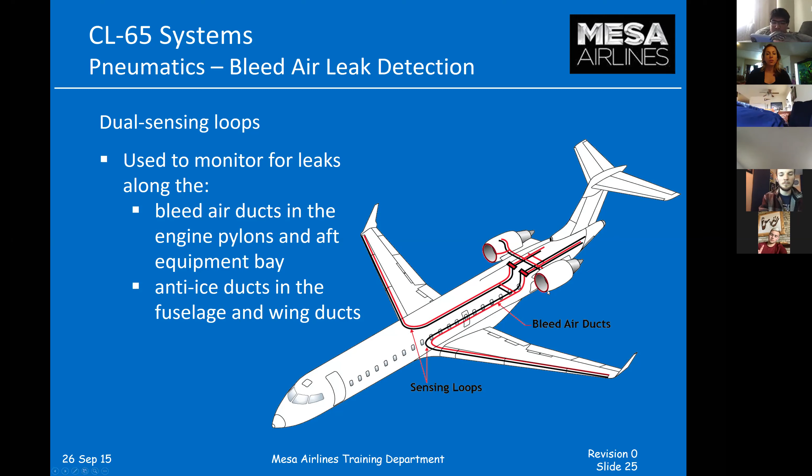Leak detection, let's just look at a schematic here. It's used to monitor for leaks. There's bleed air ducts in the engine pylons and aft equipment bay, and anti-ice ducts in the fuselage and wing. AILC makes sure nothing's wrong, and since bleed air is hot, it's got 5 zones to monitor it, with dual loops. You can isolate them if you need to. That's all QRH directed, and we're not going to go into that too deep.

Here is the bleed air control panel once again, and the 2 screens, ECS and anti-ice, where you monitor the bleed air.

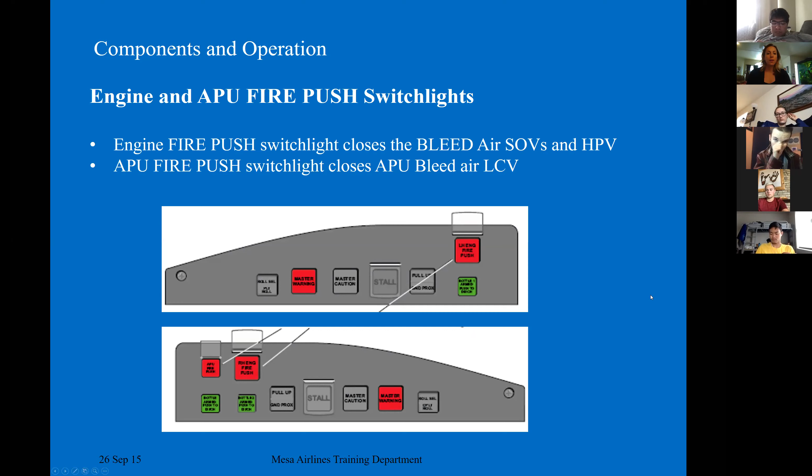Here's your fire push switch lights. The fire push switch light does more than just turn off the bleed air shutoff valves. There's 7 things that happen, but in the context of this particular lesson, that's what it does.

Notice there's not too many inhibits on the warning messages in this system. If you're having a bleed air leak, it wants you to reject the takeoff. Typically when you're gonna have a bleed air leak, I've had bleed air leaks once or twice - one was minor and one was really bad in the cargo compartment, and they happened when I pushed the engine to full power. That's basically when it's gonna happen. If something's not modulating properly, it's gonna be during the takeoff roll.

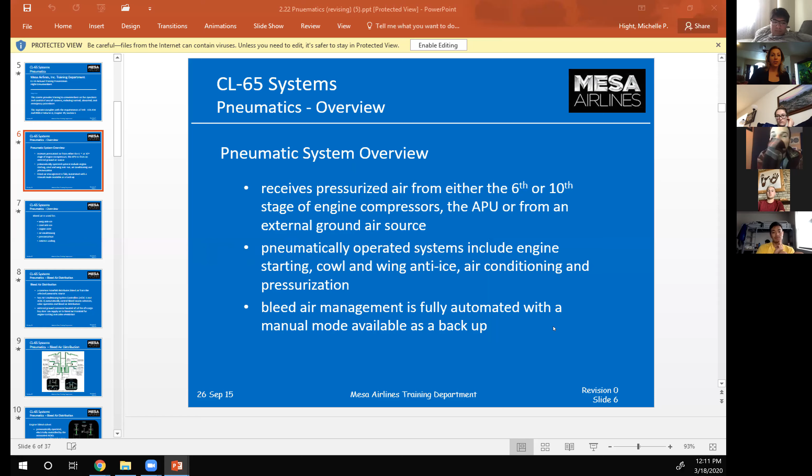You guys are probably ready at this point to go take that quiz. When is that due? I made it due Friday, the 20th. Let me look at my schedule here... Quiz for March 20th, which would be Friday. Oh my god, like in a couple days - 2 days. So before you take that quiz, do the Kahoots and the CBTs involved in the lesson.

All it is, this one is ice and rain, environmental controls, pneumatics - the 2 lectures we just went over - and then ice and rain protection. So we should review ice and rain protection.

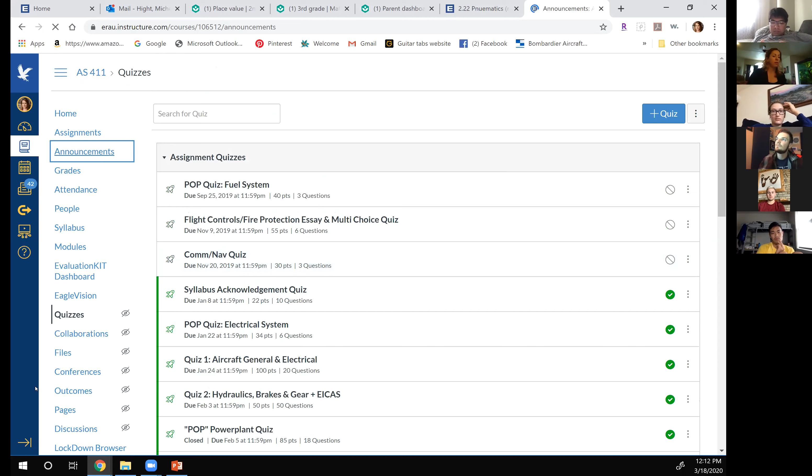At 4 p.m. today, after everybody, I go through and I just check to see if you submitted your homework, and that's going to be by 4. I'll do an announcement with a file embedded that says homework key so you have it for study, in case you have anything wrong. But make sure you do the homework - I will open it and look at it, make sure it's completed. I'm not going to correct each person, so I'm just going to see that you submitted something.

Good luck. Questions? You guys doing okay? I think this whole thing is going to be kind of like keeping us sane, meeting like this and saying hi. It does me good to see you all.

How's the test gonna work, like the final exam? I don't know, I'm going to have to make it harder so you can take it at home. No, are you kidding me? Why would you make it harder? No, it's going to be the exact test you're gonna take, be nice to us. My boss even sent an email saying be nice to them. You're going to take the exact test you would have taken, but of course I can't restrict anything now, so you're going to have everything. It's just still going to be on a timer, which makes it hard. Man, this virus is a blessing... a blessing in disguise, oh god.

I can't believe this is only Wednesday of the first week of this. I'll plan on doing this just at 11 o'clock again on Friday. We'll go over whatever the next lesson is - I don't even know at this point. And you won't be doing it again for your afternoon classes, right? It'll just be one time a day, I'm not going to do this twice a day. Hell no. I would do it if my kids weren't running around - right now it's very silent here because I have a friend watching them. So it'll get interesting.